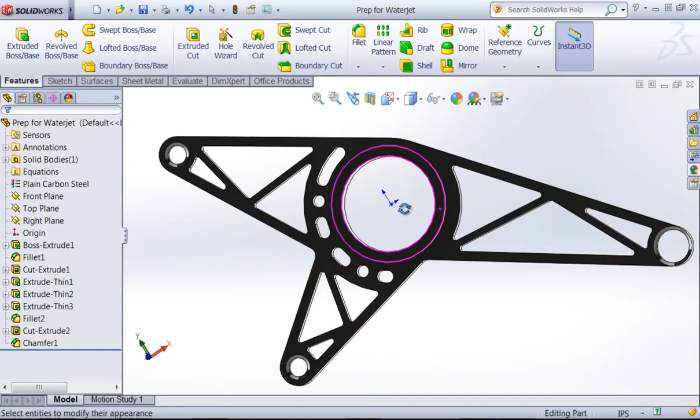So when I do go ahead and create that DXF, I want to make sure that the only lines within that drawing are the ones that I want cut out. So for example, in this case, I have a stepped extrusion, and I also have some extra chamfers.

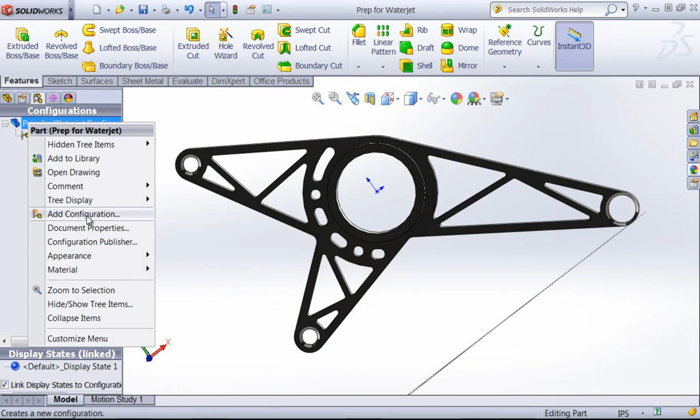And when I put this into a DXF, there's going to be no differentiation between the lines here on these edges and the lines that actually make up our cut profile. So whatever you put this into is going to cut along all of the lines it sees. So before we bring this into a drawing, I want to create a secondary configuration. You could always do this as a save as, but I prefer to just create a configuration that's simplified for creating that DXF.

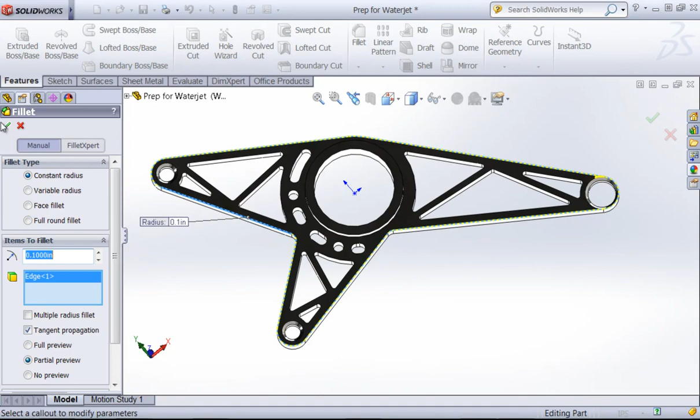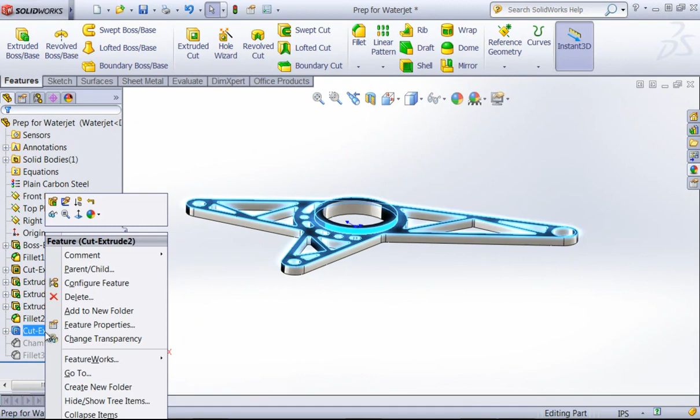So now I have a few features I want to suppress. And for example, if I had some fillets that I was going to create later on, I'd also want to suppress those out. So I'll go ahead and suppress that, the chamfer that I have on all of those edges. And this step is created using a cut extrusion. So if I look at the feature, I can see that before that, it was all one flat plate.

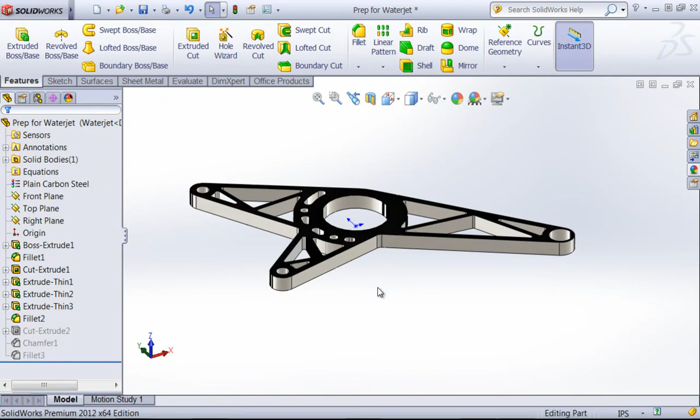And the assumption here is that that step is going to get cut out later on a mill. So once again, I can go ahead and suppress this out. And so you want to suppress any features like that it won't be able to cut out, and any fillets that aren't normal to whatever plane you're going to be working in. For example, these fillets are obviously fine because they represent part of our cut profile.

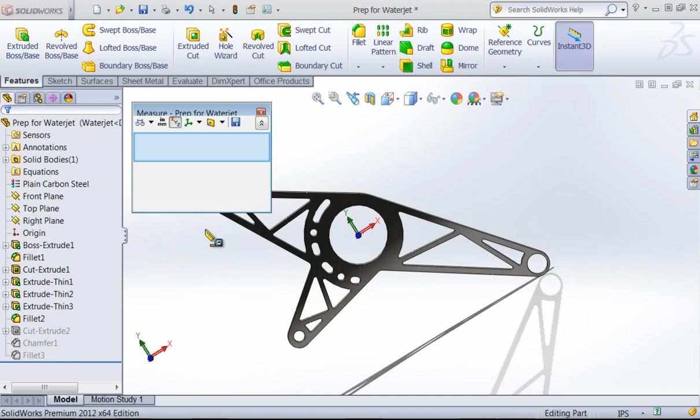So now that I have this set up, I want to bring this into a drawing. And before that, I'm going to go ahead and just take a quick look at how large the part is. So it's about 16.5 inches wide. This dimension is a little bit harder to tell, but it looks to be about 6 or 7 inches along what would be perpendicular to that opposite axis.

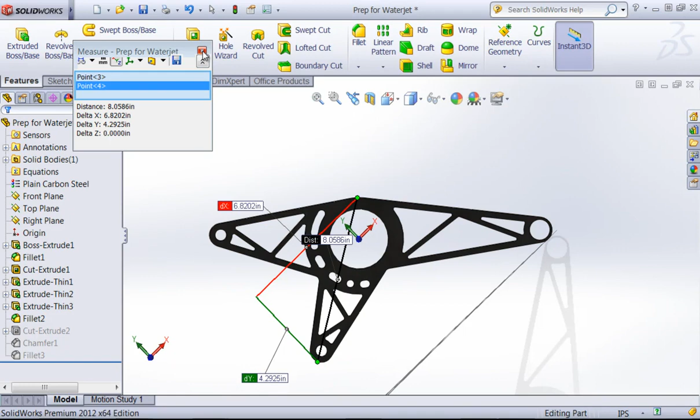So when you're creating a part using the water jet or laser cutter, you're going to choose some sort of size of stock and then try to fit these pieces as efficiently as possible. So we're going to go ahead and just assume that we need to cut out 2 of these. So I'm going to create a drawing from the part, and we want to create a blank DXF with just the cut lines. So we can just choose a custom sheet, which is going to remove any sheet format.

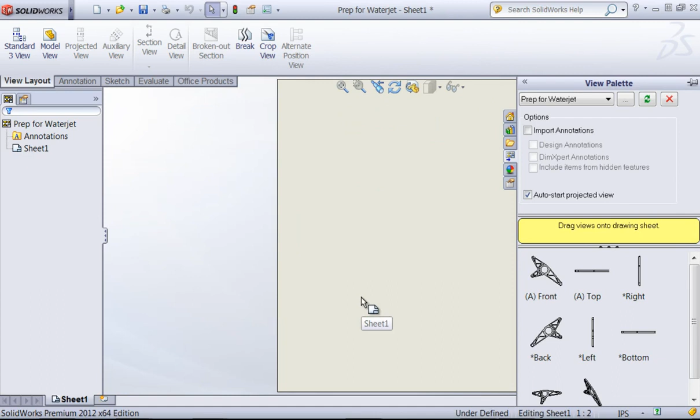And then I'm going to go ahead and just make this a little wider than necessary. Let's say 20 inches by 16 inches. And I can always update this as needed. So I'll go ahead and add one of these in. And once again, I want to remove any lines that I don't need, so I can remove all those center lines.

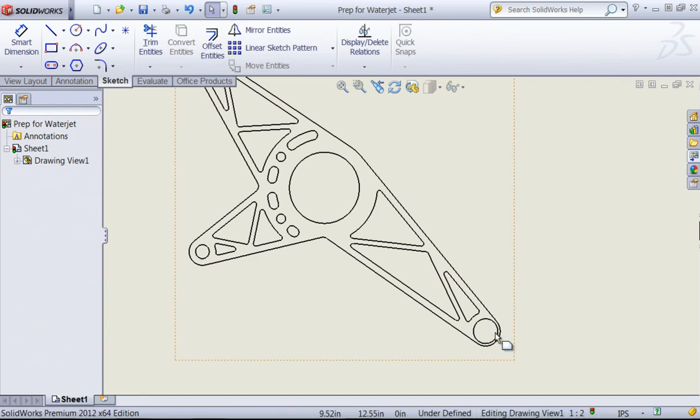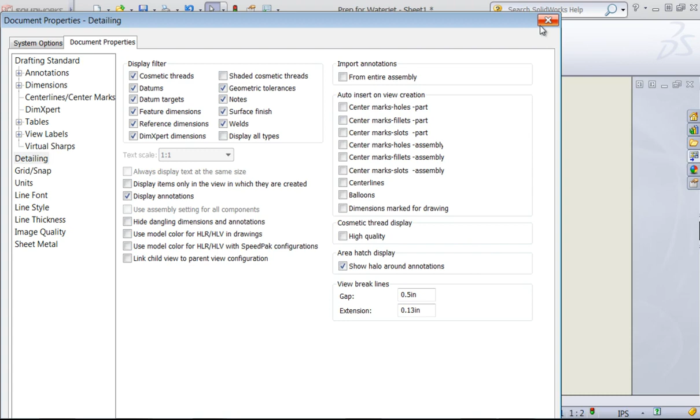If you're going to be cutting a lot of 2D parts, you can always create a new template where you uncheck all of the detailing options so that when you bring in your view, it's not going to bring in any of those center marks. For example, in this case, I could turn off the center marks for holes in a part, and then I'm not going to have to go back in and delete them. And I could label that template something like water jet or laser cutter.

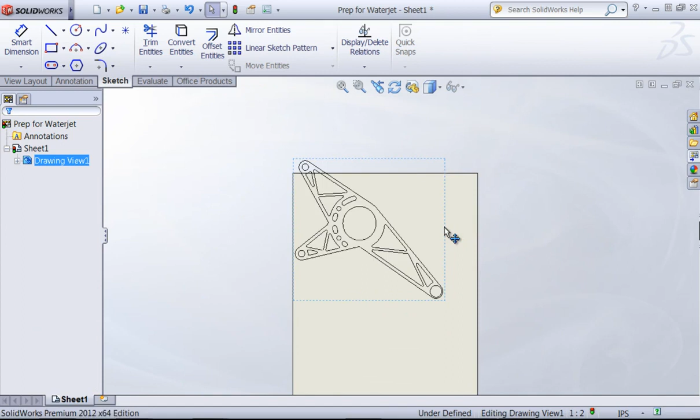Now the next thing I want to check here is that I have the right scale. We're going to want to use a scale of 1:1, and typically this will come in scaled otherwise. And if we stick to that other scale, it's going to get cut out as a half-size version of itself. So we want to make sure we have the right size.

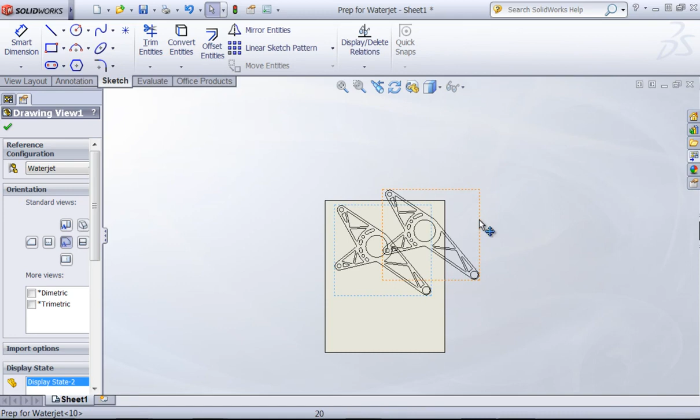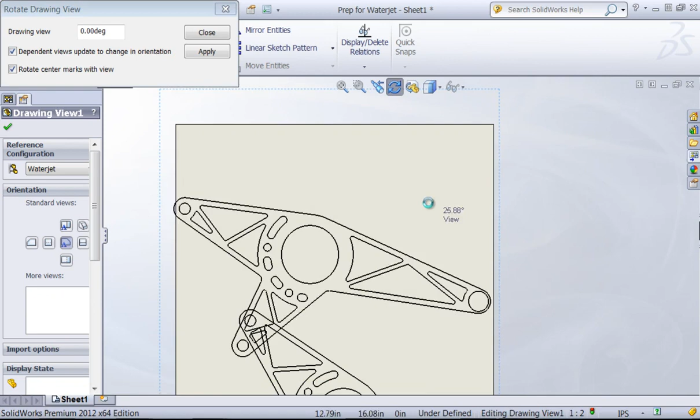So I'm going to go ahead and click on the view and do a Control-C to copy and a Control-V to paste. So we have two of these. And then typically I'm going to want to add these in as efficiently as possible. So I'm going to go ahead and rotate this view. Apply that change. And I'll do the same with the other.

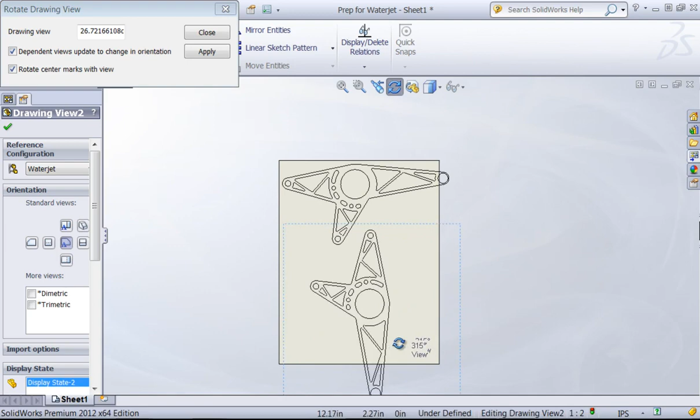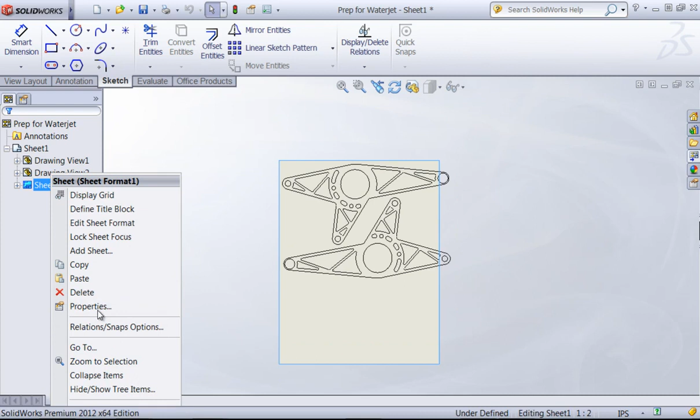And I'm not going to worry too much about the sheet size right now, as I can update that in a second here. So if I go back into the sheet properties, I can make a quick change. And it looks like I modified the wrong dimension there. So I'm going to make this 18 wide and change this to maybe 12 inches tall and see if that works out.

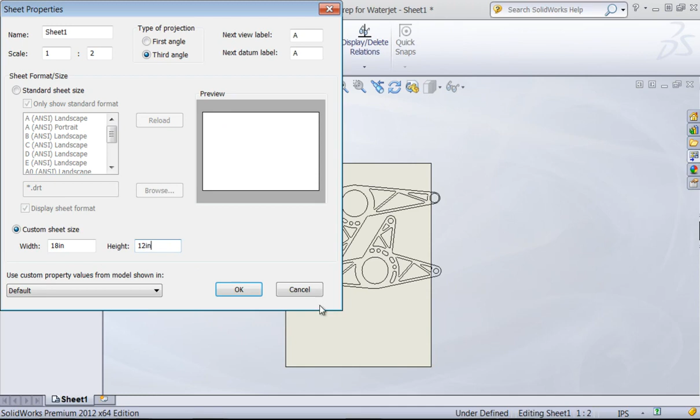Getting the sheet size exactly right isn't actually that important, because when we save this out to a DXF, it's only going to look at the lines that are part of the models, and it's going to ignore this bounding area. The reason to set your sheet up like this, though, is that you'll typically be working with a size of material. For example, in this case, 18 inch by 12 inch might be the piece of aluminum or steel that we're working with.

And we might also have to look out for areas where we would need to clamp down the material. For example, if we're using an Omax water jet, we'd probably have to put a clamp right around here and maybe somewhere in here as well. So this is somewhere where we might have to actually change the position of this a little bit so that we do have some material to grab onto. But once again, you'll see when I save this out, it's only going to save out the lines from the model.

So I'll do a save as, and I can save this out as a DXF. And depending on what program you're working with, if you're exporting a DXF or DWG, certain programs will only accept certain standards, and the newer versions of any water jetting or laser jetting program should accept most of these. But by default, it's set to the 2000 to 2002 version.

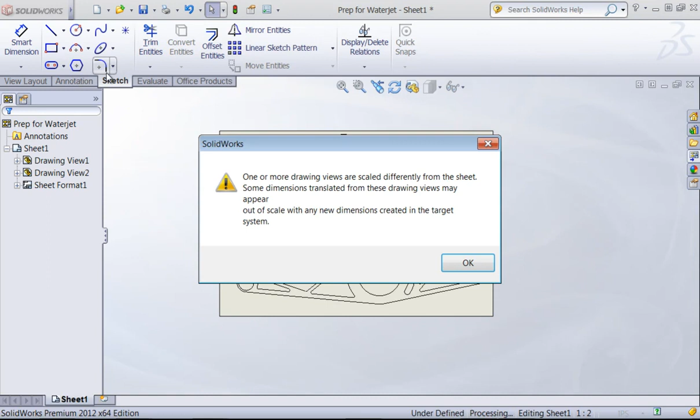There's also some other export options, for example, changing splines to polylines. Some programs will like the polylines better and not recognize the splines well, whereas some will have no trouble importing either. That'll just come down to whatever 2D cutting program you're using. You'll have to figure out what export options work best for that program. So once again, I can just save this out quickly as a DXF.

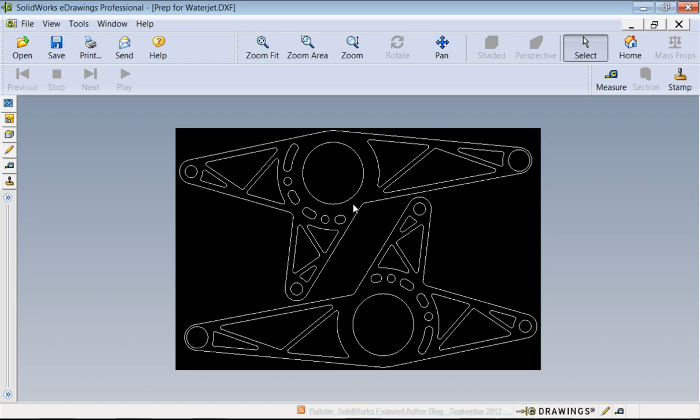So once we do have this saved out as a DXF, typically we can open this up in AutoCAD or DraftSight. I don't have either of those installed, so I just went ahead and opened it up in eDrawings so you can see the result. And you can see it just exports out those lines from the model and nothing else. And once again, you can see that because this is flat, if we did still have that cutout, we would also see another circle here. And that would be created as part of the path when you enter that into the 2D machining program.